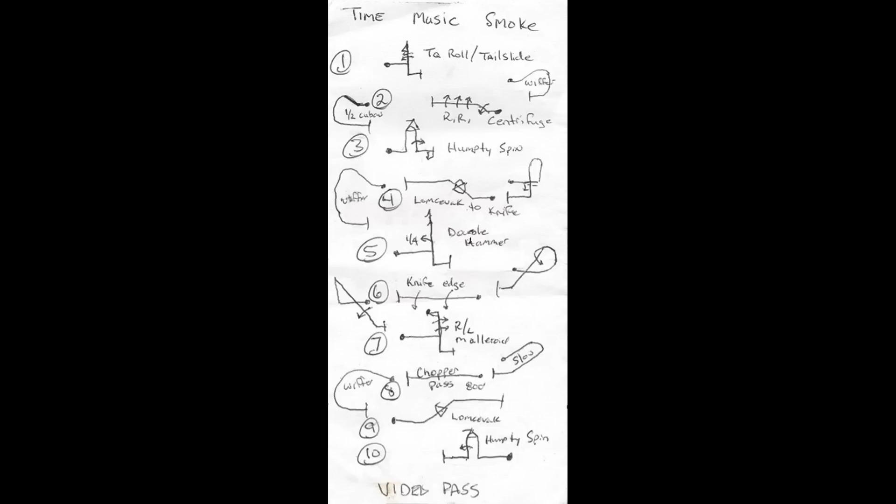Some commented that Steve flew too many maneuvers. His routine was 10 maneuvers. From looking at routines flown by other aerobatic pilots, 10 maneuvers does not appear excessive. It is easy to compare Steve's routine to other routines by looking at YouTube aerobatic flight videos.

When performing in aerobatic competition, the rules require that pilots stay inside the aerobatic box, an area that is 3,300 feet long by 3,300 feet wide, with a maximum altitude of 3,500 feet. The elevation of the bottom of the box depends on the pilot's aerobatic experience level. Here is an approximation of that box relative to the Cameron Airport.

One other consideration is Steve's position relative to the spectators at the time he initiated the Lomcevak. Although he wasn't performing in aerobatic competition, he had passed the center point and was heading away from the spectators. It may be possible that a concern about flying too far away caused him to momentarily lose his awareness of his altitude, and he initiated the Lomcevak maneuver.

Let's look at wind direction, stall, and altitude.

Steve was flying downwind when he attempted the Lomcevak maneuver, which cancels all lift on the wings until it's recovered. As experienced pilots know, as little as 5 miles an hour can make a difference whether you have lift or not. The NTSB report shows the wind was variable at 5 knots at Kansas City International Airport, 33 miles away. From this windsock, what do you determine the wind to be at the Cameron Airport?

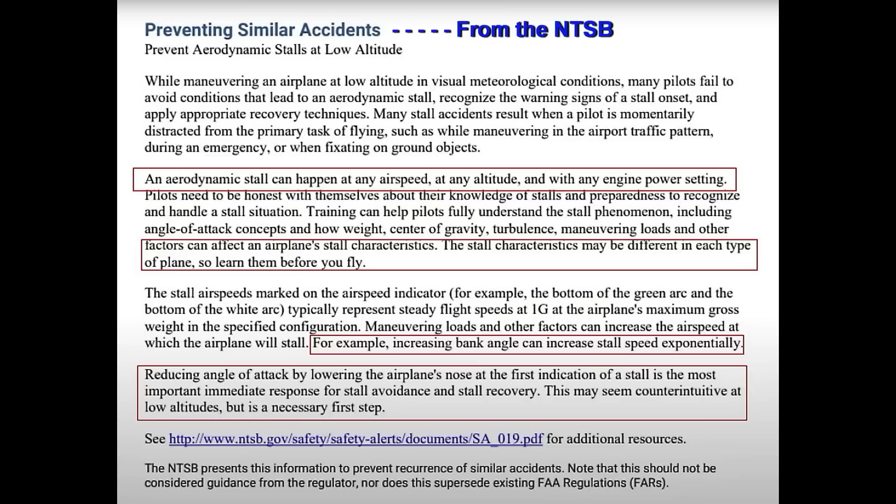As noted in this NTSB warning about preventing aerodynamic stalls at low altitude, it states an aerodynamic stall can happen at any speed, at any altitude, and with any engine power setting.

Initiating the Lomcevak at too low an altitude has been a major factor and is stated in the NTSB report. It is estimated that Steve went into the Lomcevak at 600 feet, and that it appeared he would have recovered if he hadn't run out of airspace.

Since Steve was in a stall spin, let's listen to what Dan Gryder of the Probable Cause YouTube channel has to say about recovering from this type of loss of control. You'll find a web link to Dan Gryder's Probable Cause YouTube channel in the description box below this video.

Remember, you can't spin it unless you stall it first. You can't stall it unless you exceed the critical angle of attack and get this thing going too slow. At 1,000 feet, there is no spin recovery technique that's going to work for you. You're going to get a full turn, and your spin recovery technique is futile below 1,000 feet.

Now let's evaluate whether there was fuel starvation or engine failure. Many who watched the original tribute video felt the plane ran out of fuel. Here are some of the comments. Once again, you'll need to pause the video if you wish to read them.

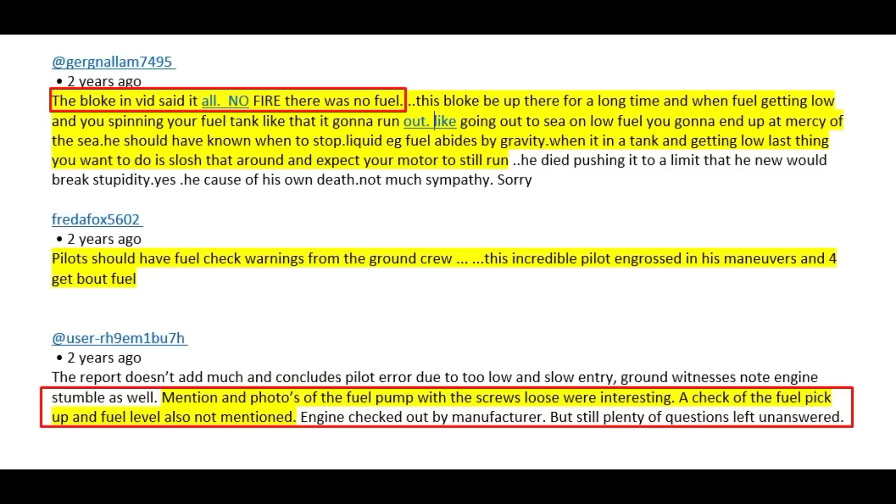The fuel starvation conclusion came from 3 observations: intermittent lack of sound from the engine, lack of regaining power, and lack of fire upon impact.

If you listen closely, it sounds like Steve attempted to add throttle in the rotation before the attempt where the white show smoke bursts out.

Now let's compare the 2 Lomcevak maneuvers when power is applied. While recognizing Steve was low and slow when he started the Lomcevak, and regardless of the fact that bursts of power are used to recover from a spin, the strong response to the throttle in the practice session compared to the lack of response and failed sustainability of increased fuel to the engine causes me to suspect a fuel delivery problem. Power was not regained as I would have anticipated when Steve opened the throttle and the show smoke reappeared.

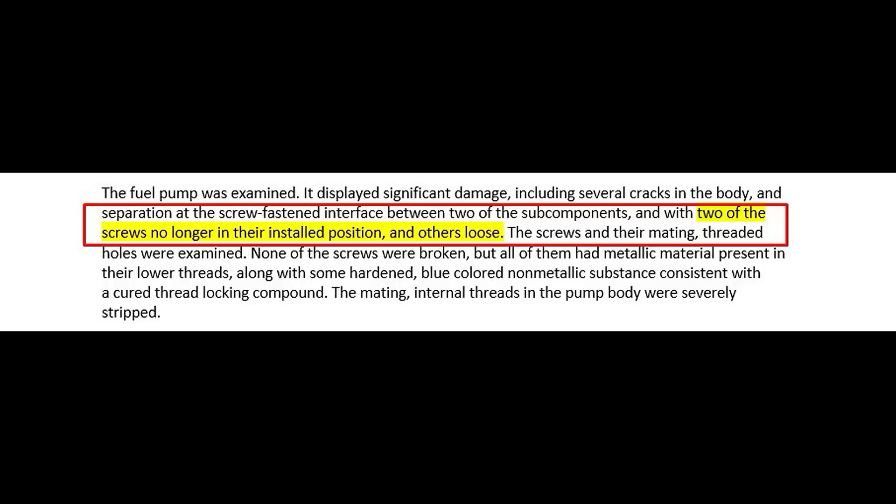Unfortunately, the NTSB investigation never mentioned fuel in their report. They stated some concern with loose screws on the fuel pump, but reported the pump was severely damaged upon impact and assumed it was working properly. Unfortunately, they never mentioned investigating the fuel tank or fuel system.

The NTSB could have easily done the following: checked airport records showing how much fuel Steve purchased on Friday evening, checked airport records to see if he purchased additional fuel on Saturday, checked how long the plane had flown after receiving fuel, even though aerobatic maneuvers at full power don't correlate with normal flight fuel usage, and checked the fuel tank to see how much usable fuel remained. None of this was done.

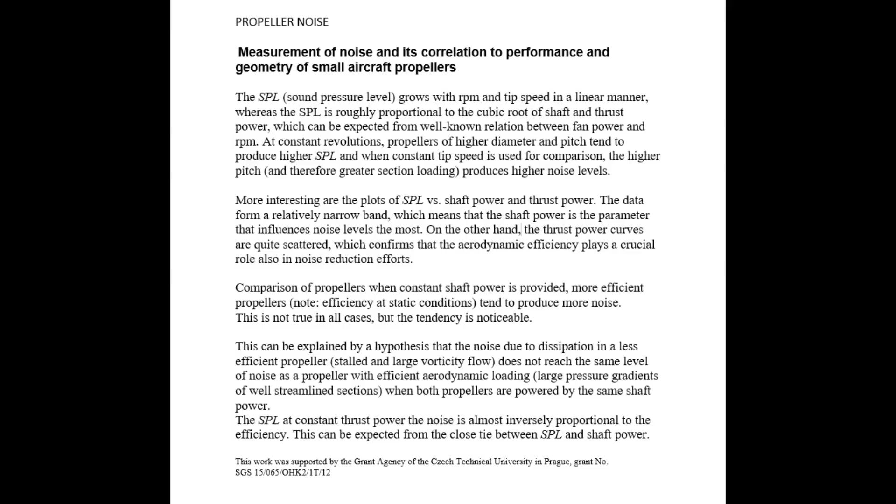The absence of sound can be attributed to 3 possibilities: the direction of the exhaust changing during the Lomcevak maneuver, reducing or increasing power depending on the aircraft's attitude while attempting a recovery, and Steve had changed the Pitts stock 2-bladed propeller to a 3-bladed prop that created additional sound. The sound from this propeller varies depending on the engine's RPM.

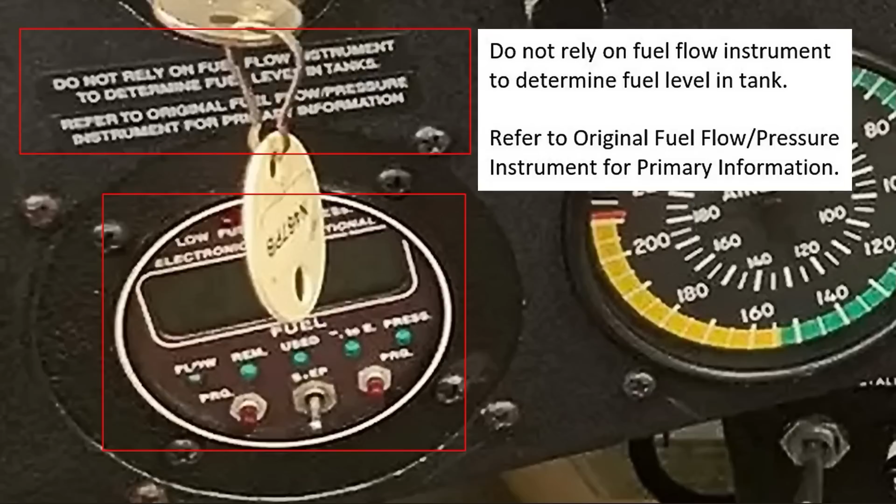Although some Pitts control panels include an electric fuel gauge, Steve's control panel doesn't appear to have one, so the only way of determining fuel level would be from the sight gauge tube. You may wish to pause the video and read what one experienced Pitts pilot has to say about the accuracy of the sight gauge tube.

To determine whether fuel starvation occurred requires additional information that is no longer available. You are welcome to express your opinion in the comments section.

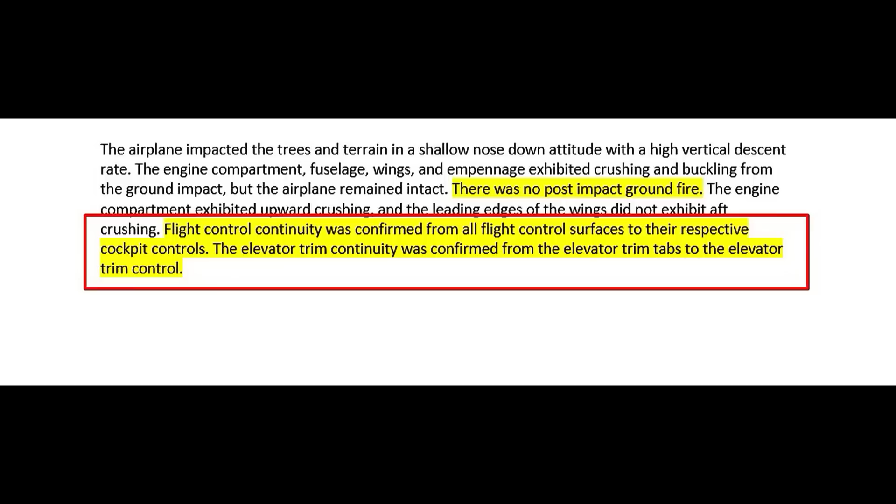Control surfaces watching the Lomcevak maneuver in slow motion and zoomed in. According to the NTSB evaluation, there was no indication of problems with the controls. Several people who viewed the original video commented about the position of the control surfaces. In that video, the plane was so far away, I was unable to observe control surface changes accurately. Therefore, I made this zoomed-in video clip in slow motion so you can better see the control surface changes.

At this point, the control surfaces appear to be in the neutral position. The ailerons are now correcting to stop the roll. Approaching and passing through a level attitude, the control surfaces are neutral again.

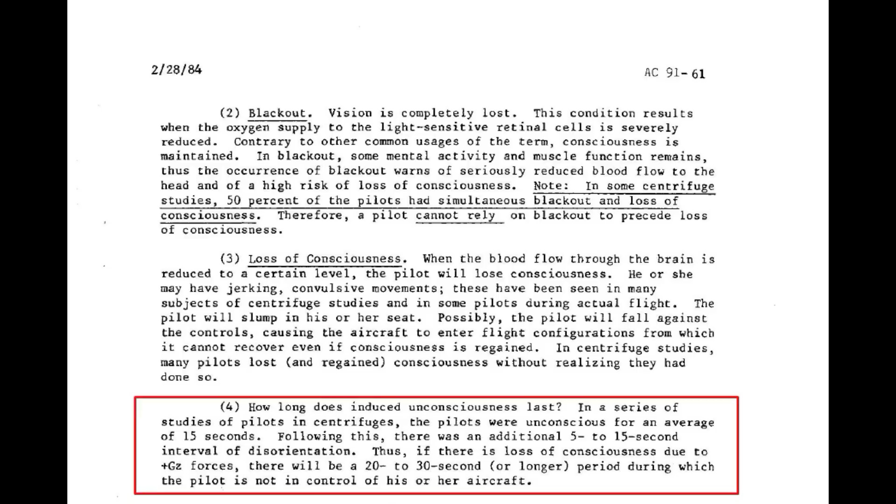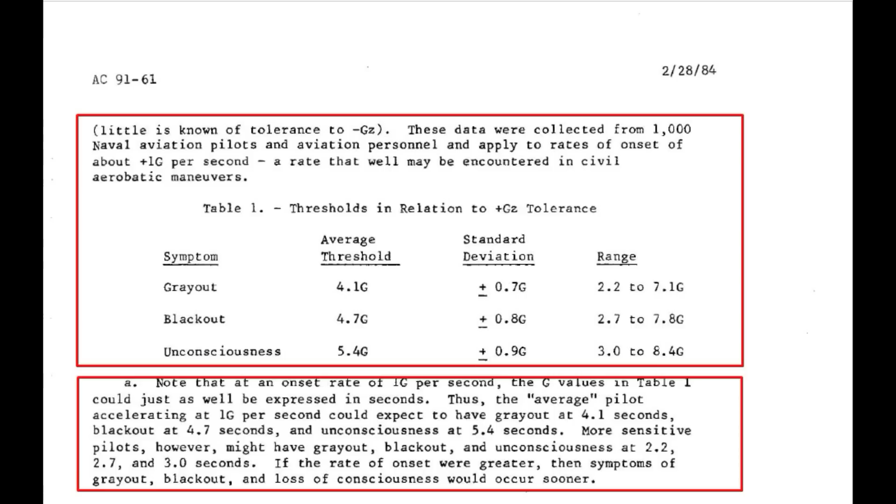Per this study, the average pilot was unconscious for 15 seconds and not in control of the aircraft for 20 to 30 seconds. Accelerating at 1 G per second, most pilots will gray out in 4.1 seconds and black out at 4.7 seconds. Some pilots are more sensitive and experience problems sooner.

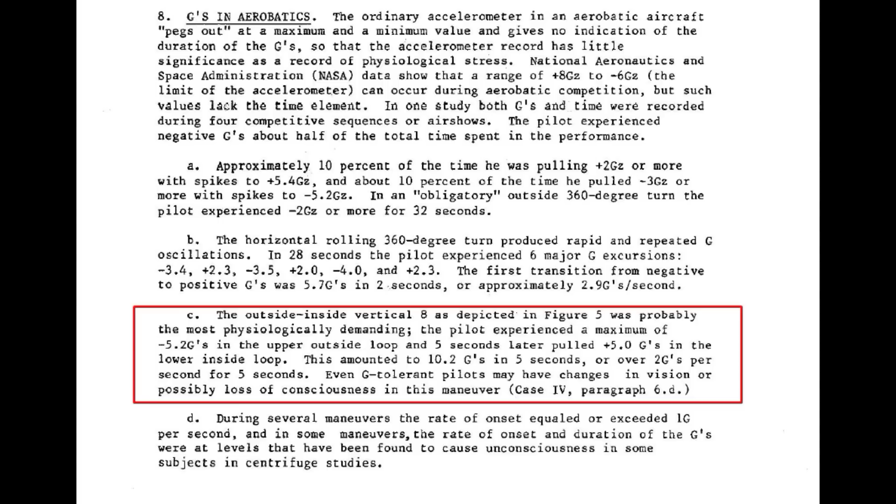An outside-inside vertical loop was deemed the most physiologically demanding maneuver, plus 5 Gs to minus 5 Gs in only 5 seconds. Changes in vision and loss of consciousness are possibilities. Whether G-forces may have affected Steve Oberg, we will never know, but it is obvious he was attempting to fly his aircraft the entire time.

This outside vertical loop was earlier in his Saturday performance after his third maneuver, a Humpty spin. But adding up the G-forces he experienced throughout the show, it may have had some cumulative effect on judgment.

In another comment from Charles Foster, he noted how Steve was very aggressive with the whiffer transition prior to attempting the Lomcevak. Charles attributed it to adrenaline, though he didn't say that specifically.

Notice how Steve aggressively snapped into a left bank to enter the whiffer transition. Also notice on Friday how wide and sweeping he performed the same maneuver. In fact, I had to speed up Friday's video so I could match up the next maneuvers. Charles may have been onto something in his assessment.

Besides G-forces, could medications possibly have had some negative effect? Steve's toxicology report revealed the following: fexofenadine, sold as Allegra, ibuprofen, and azacyclonol.

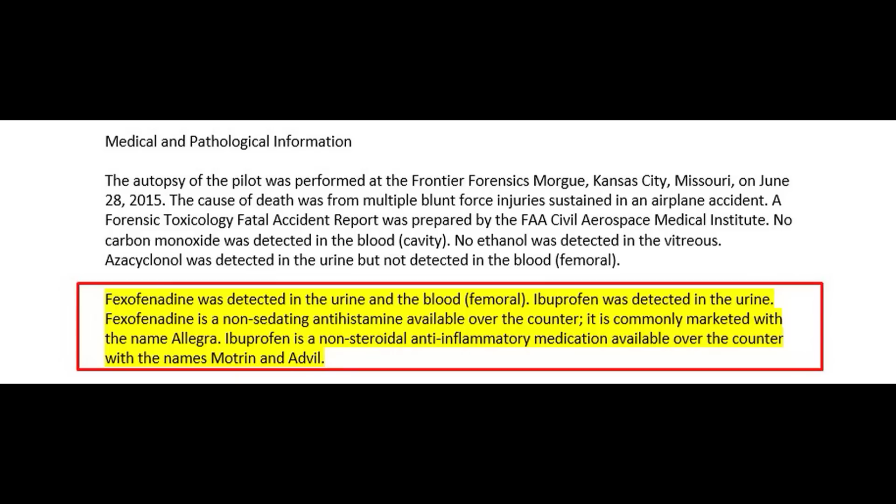The NTSB report states there was no evidence of any medical condition or substance that would have contributed to the pilot's loss of control during performance of aerobatic maneuvers. They also stated that fexofenadine is a non-sedating antihistamine. Of course, Allegra's webpage confirms this.

However, I looked up fexofenadine on drugs.com. I found the following: you have to scroll down the web page to find this information, but although uncommon, there are possible side effects.

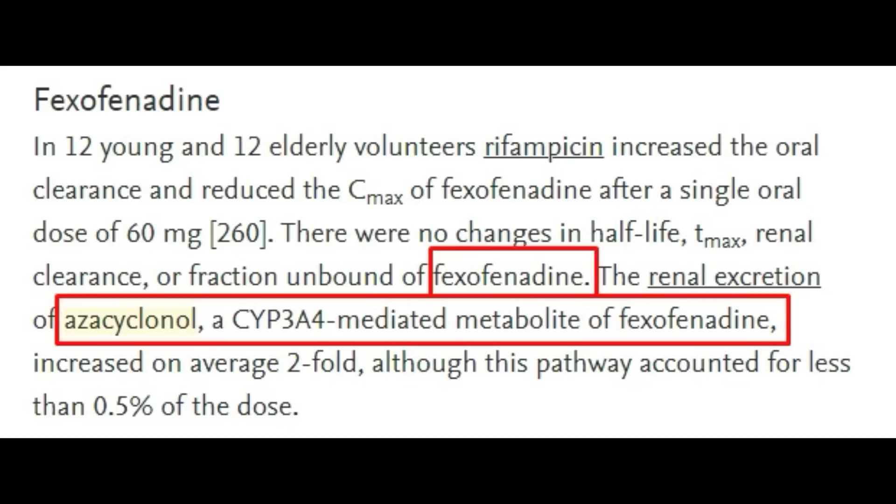Azacyclonol appears to be part of the makeup of fexofenadine, according to another web page. You'll find links to all of this information in the description box below the video.

I'll end this section on medications and disorientation with a comment made by Brad A. regarding the NTSB report. He stated: also, maybe it's something to think about if you have to take decongestants and azacyclonol, a sedative, and fexofenadine and ibuprofen to get ready to fly. Maybe you shouldn't be flying aerobatics.

Food for thought. Pilot experience. Although Steve, a highly experienced professional pilot, had logged over 11,000 hours of total flight time in various aircraft, including helicopters and jet fighters, he only owned the Pitts for 2 years, logging about 200 hours.

How many of those hours were spent practicing or performing aerobatics, we do not know. But 200 hours should be plenty of time to become proficient with a particular aircraft in regular flight. According to the maintenance records, the Pitts flew 55.4 hours from April 2014 to May 2015, with 13 additional hours from the time of inspection until the time of the crash.

There is no mention in the NTSB report indicating how many of those hours were spent flying aerobatics, or whether Mr. Oberg had flown any other air shows between his debut aerobatic performance at the Cameron Airport a year earlier in 2014 and when he crashed in 2015.

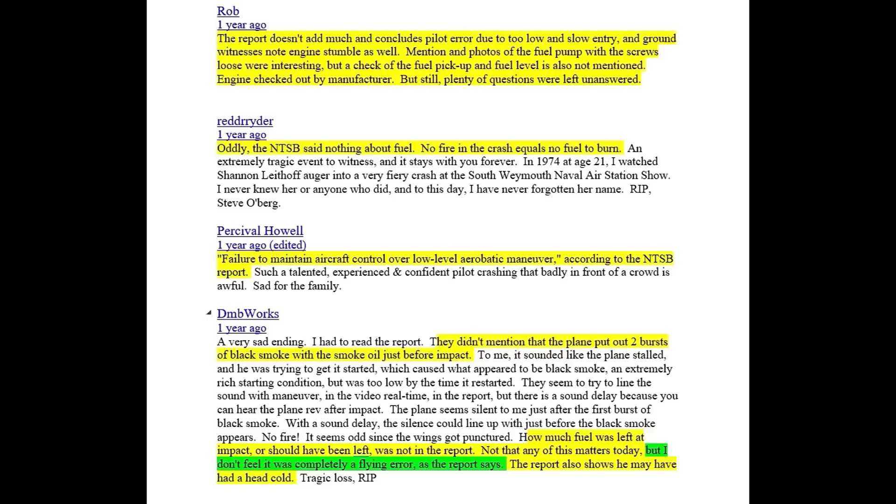When I posted the original Steve Oberg tribute video, I never anticipated the hundreds of comments from viewers who wondered why such a highly experienced pilot crashed. In attempting to answer their question, I replied by giving them a link to the NTSB report. However, I felt the NTSB investigation failed to answer their question and fell short of the NTSB mission statement.

Their conclusion in this Cameron Airshow accident was more of a report telling what happened, but not why it happened. It's obvious the Lomcevak was entered at too low an altitude, but why? What good is it stating the obvious if we don't learn why it happened, plus get recommendations to help prevent it from happening to others? The purpose of an NTSB investigation is to determine why it happened and to make recommendations that may help prevent a similar occurrence. They made no recommendations.

Here is the NTSB promo video where they state that making recommendations is their purpose.

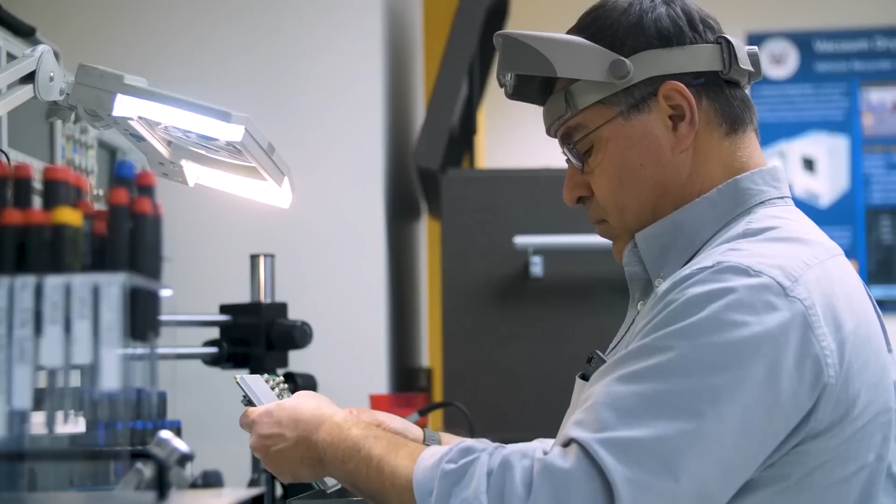Our effectiveness is grounded in our reputation for conducting thorough, accurate, and independent investigations. We produce timely, well-considered recommendations to enhance transportation safety. This is our mission. We are the NTSB.

Notice they say to enhance transportation safety. I may be way off base, but since the NTSB is mainly concerned with transportation safety, I wonder if they put less concern in evaluating a performance flight crash versus the transportation crash like that of an airliner. Nevertheless, that doesn't explain their lack of recommendations regarding general aviation crashes.

Once again, here's Dan Gryder from the Probable Cause YouTube channel with facts about the NTSB and their lack of recommendations in the 32 months following January 1st of 2020. Since 2020, there's been 3,094 general aviation accidents. That includes Part 135, Part 137, which is Ag, and Part 91. 3,094 of them. There's been 539 fatal accidents in those three categories alone.

Part 91 makes up the bulk of it. 539 fatal accidents. Out of that, how many recommendations has the NTSB made? Remember, the job of the NTSB is to investigate, produce a probable cause, and a recommendation. They go hand in hand. Producing a probable cause is only 10% of the battle. 90% of it is producing a recommendation that will prevent its further reoccurrence in the future.

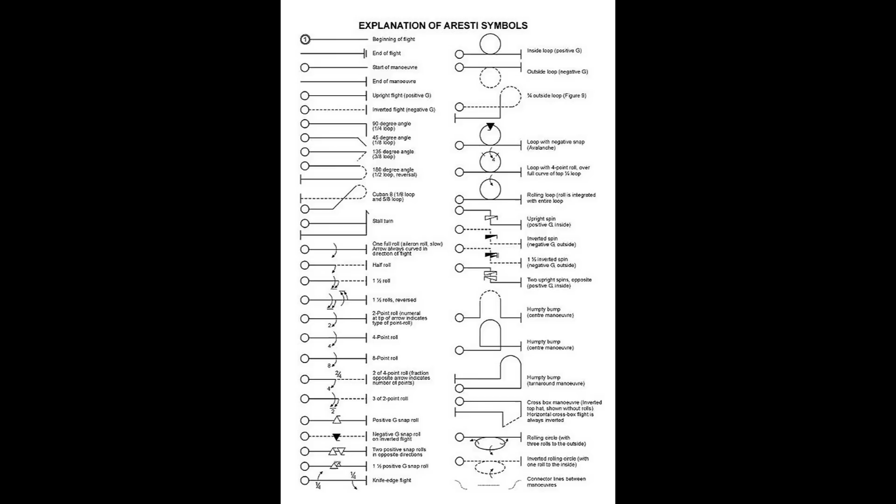If performing aerobatics, never include similar maneuvers or transitions close together in a routine that may allow for confusion. Be sure the transition maneuver between airshow maneuvers always results in adequate altitude for your next maneuver plus a safety margin. I see no reason to perform the Lomcevak maneuver.

It's not an exciting crowd pleaser like a hammerhead stall, a Humpty Bump, or a tail slide, and nobody really cares to see you perform it. It's not part of the airshow aerobatic competition maneuvers and is inherently extremely dangerous. Reconsider performing a Lomcevak in an airshow performance.

Even performing a 4-point roll better shows your flying expertise. If you fly aerobatics, the crowd has no idea what your maneuver schedule is. If you miss a maneuver or feel it is unsafe to perform for any reason, skip it and no one will know or care. Whenever possible, plan your aerobatic maneuvers 3 mistakes high.

Be sure to share your evaluation of this accident and any recommendations you have that may save lives. When expressing your evaluation in the comment section below, I ask that you please keep two things in mind. It's not about whether others agree or share your observations. Expressing your opinion about what you observe may help others see something that they missed. In that light, discuss and share your ideas, but please keep your comments civil. We all see things differently depending on our knowledge and experience, and differences of opinion may help us reevaluate our own conclusions.